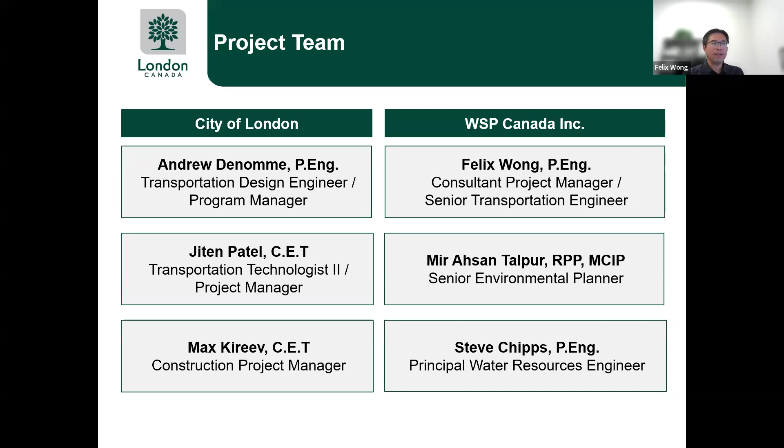Hi, my name is Felix Wong. I'm the project manager from WSP, and I'm also a senior transportation engineer with the company. With me today I have Mir Talpur, who is a senior environmental planner, as well as Steve Chipps, principal water resource engineer. With the introductions complete, I will pass it on to Mir to start off with the presentation.

Thanks, Felix. Good afternoon, everyone. I will be providing an overview of this project and the purpose of this meeting, and some background about the project and how we came to this point in this undertaking. Then I will hand the presentation back to my colleague Felix, who will go into the details of the planned improvements, and then I will take over again to go over the required environmental permits and approvals for the project, environmental protection measures, and the construction schedule.

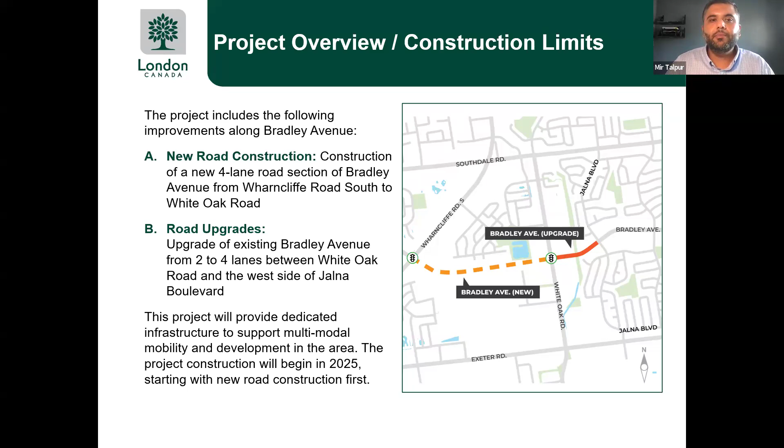As Andrew mentioned earlier, the planning of this project has been going on for quite some time. In 2005, the City of London completed an environmental assessment study which recommended the extension of Bradley Avenue from White Oak Road to Bostwick Road, with a 4-lane cross-section with dedicated pedestrian and cycling facilities.

In 2013, the city completed a transportation master plan update confirming the need for this extension to manage continued growth in the city. In 2017, construction of Bradley Avenue between Wonderland Road and Wharncliffe Road was completed.

In 2018, the city initiated detailed design and property acquisition for the Bradley Avenue extension from Wharncliffe Road to Jalna Boulevard. An addendum to the 2005 environmental assessment was completed in 2022, recommending widening of Bradley Avenue from White Oak Road to Jalna Boulevard with dedicated pedestrian and cycling facilities. As noted, construction is planned to begin in 2025.

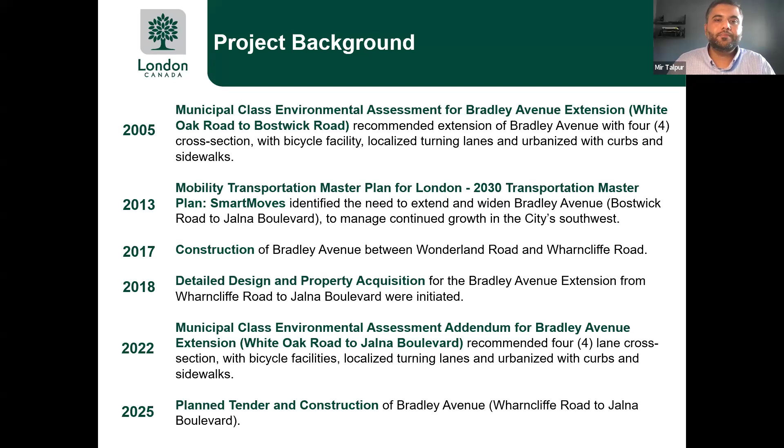I will now hand it over back to Felix, who will go into the details of the project components. As Mir mentioned, we're going to start with the Bradley Avenue extension portion between Wharncliffe and White Oak Road first, followed by the widening portion between White Oak and Jalna Boulevard.

For the extension portion, the existing land within the proposed corridor is mainly vacant land to facilitate future developments, as well as wooded areas. There is an existing stormwater management pond located just west of White Oak Road, top right corner of the map. There are existing portions of Bradley Avenue just west of Wharncliffe Road South and easterly of White Oak Road, with a missing connection between the two sections of road.

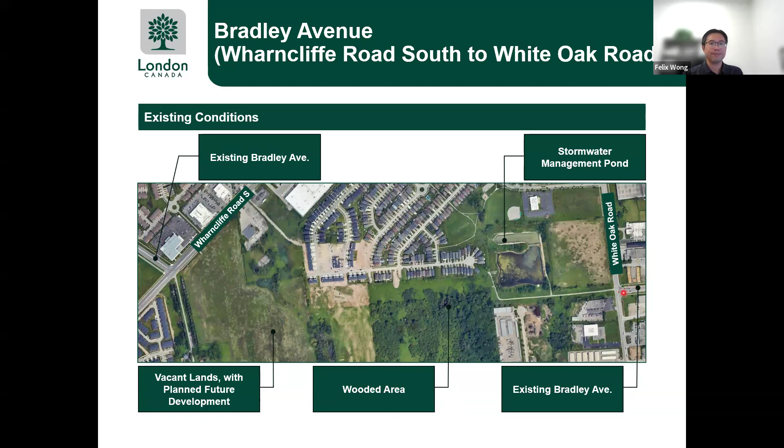As part of the planned works, the proposed extension connects the two pieces of Bradley Avenue running through the vacant lands and woodlots, requiring removal of some trees within the wooded area. The road is proposed as a 4-lane urban road with proposed storm sewers and water main. Vegetation removal to facilitate this extension will begin in the fall of this year.

A new traffic signal is proposed at Wharncliffe Road South, and existing signals at White Oak Road will be upgraded. The existing stormwater management pond is being upgraded to provide stormwater management for the proposed roadway. A new culvert is proposed at the White Oak Channel to maintain drainage, and the channel corridor will also be upgraded as part of another city project.

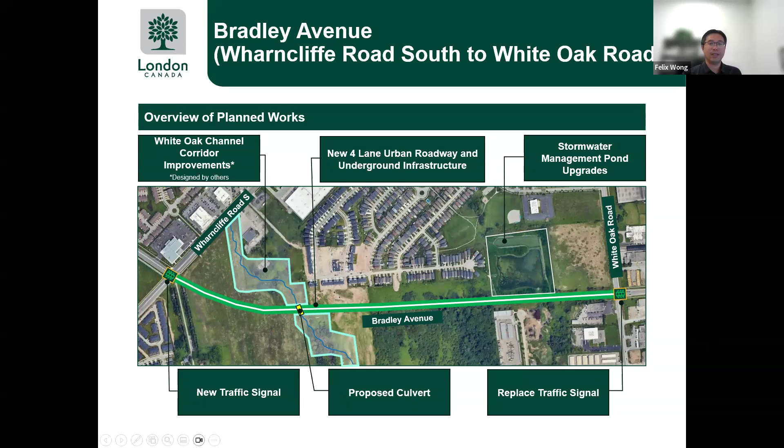Here is a clip of the proposed roadway extension. A full plan of the proposed work is available on the city's project website for download.

This proposed roadway is a 4-lane urban road with 2 lanes each direction. Turning lanes are proposed at the intersections. There will be proposed sidewalks and bike lanes located on both sides of the road, as well as a landscape boulevard provided between the curb and the sidewalk. The intersections are being improved to facilitate crossings by multiple modes of mobility.

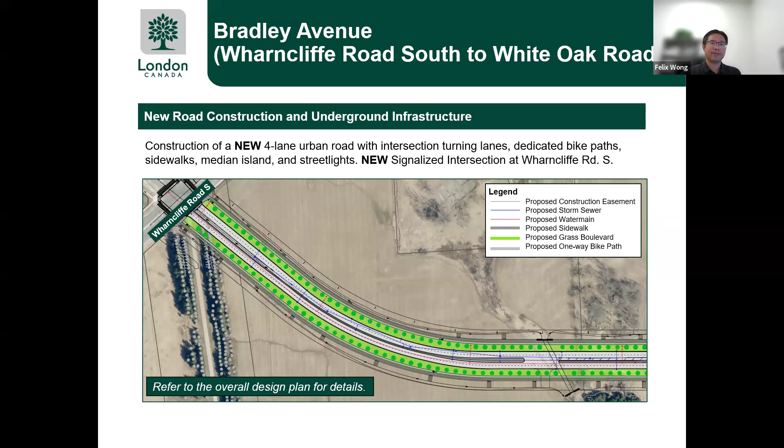And here is a typical cross-section of the proposed road work. The proposed road will have a 45-meter right-of-way, and as noted earlier, 2 lanes of traffic for each direction. There will be a raised center median, and full illumination provided throughout the corridor. Sidewalks and bike paths are on both sides of the road, separated from traffic, and there will be a landscape boulevard in between.

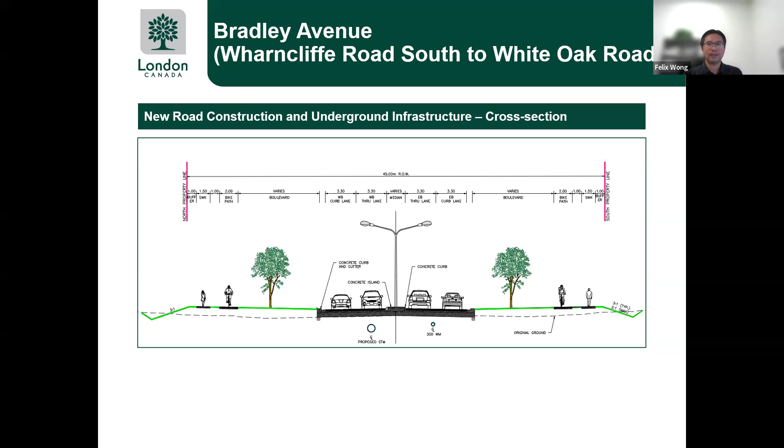In terms of the stormwater management pond, the existing pond will be upgraded to provide additional storage. This facility is on the west side of White Oak Road and will be on the north side of the proposed roadway.

A 4.2 meter span culvert is provided at the White Oak Channel. This culvert will allow fish passage within the improved naturalized watercourse.

As part of the city's future project, this future channel corridor improvement will include construction of a naturalized channel corridor crossing Bradley Avenue just east of Wharncliffe. The complete corridor design will include a 60-meter wide corridor of open space, incorporating a natural drainage channel, wetland compensation, wildlife habitats, recreational trails, as well as stormwater management facilities.

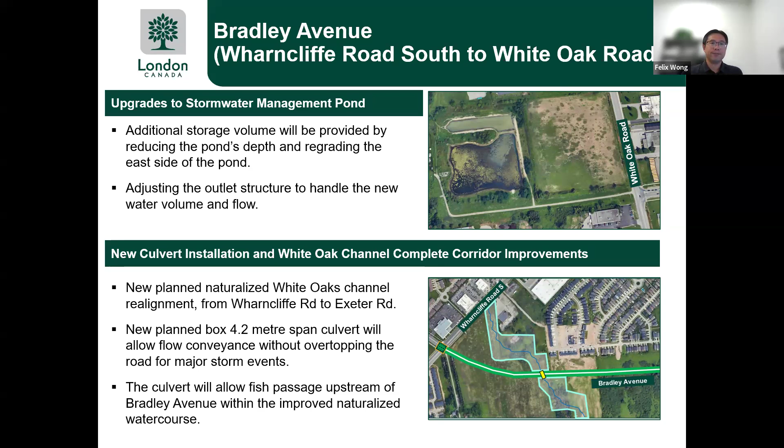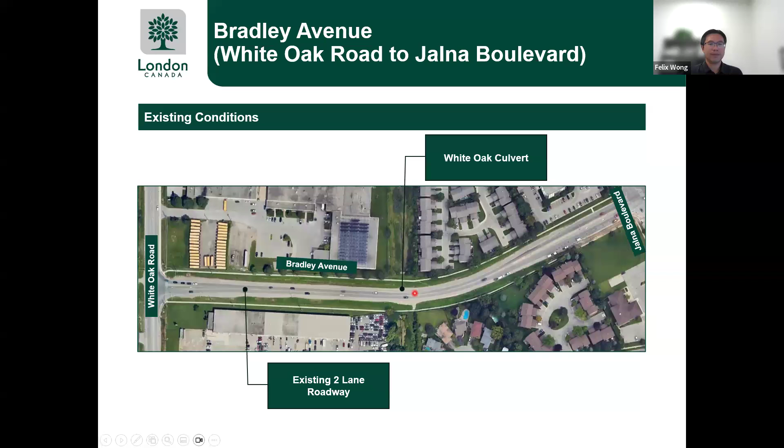With the proposed work, the proposed road will be widened to 4 lanes, 2 lanes each direction. It will be an urban cross section with curbs, sidewalks, and bike paths, as well as landscape boulevards where feasible. The existing culvert will be replaced to improve existing drainage conditions, as well as the signals at White Oak will be upgraded.

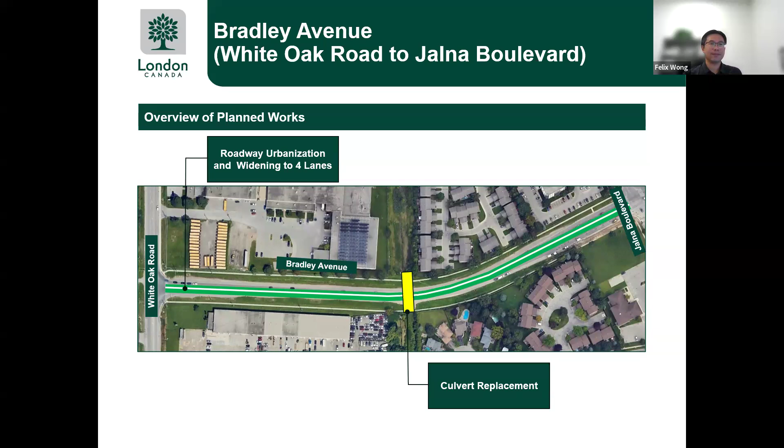And here is a clip of the proposed roadway improvements. Again, the full plan is available for download at the city's project website. As noted earlier, this proposed widening will consist of 4 lanes in total, 2 lanes each direction. There will be curbs, sidewalks, and bike paths.

As shown on the drawing, the intersection at White Oak Road will be improved with modifications of the traffic signals. This will facilitate movement by multiple modes of mobility. Pedestrian and cyclist safety are being improved at the intersection with provisions of pedestrian crossings at all legs, while we try to shorten the pedestrian crossings where possible. As well, bicycle crossrides and bike boxes are being provided. As noted, the existing culvert will also be replaced.

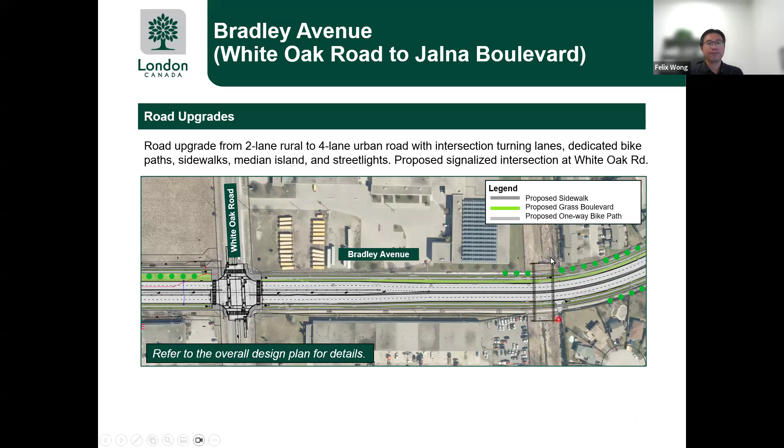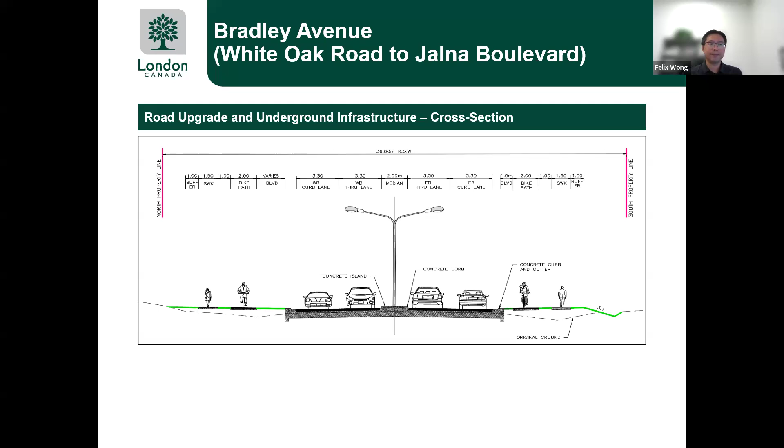The proposed culvert will be replaced and upsized to improve capacity and flow conveyance of the crossing. This is being proposed as part of the city's resiliency to climate change. As part of the improvement, existing weir structures along the channel will also be removed. The new structure will allow for flow conveyance without overtopping of the road for major storm events, which would reduce the risk of flooding in the area. As well, the proposed work will also improve fish habitats and fish passages.

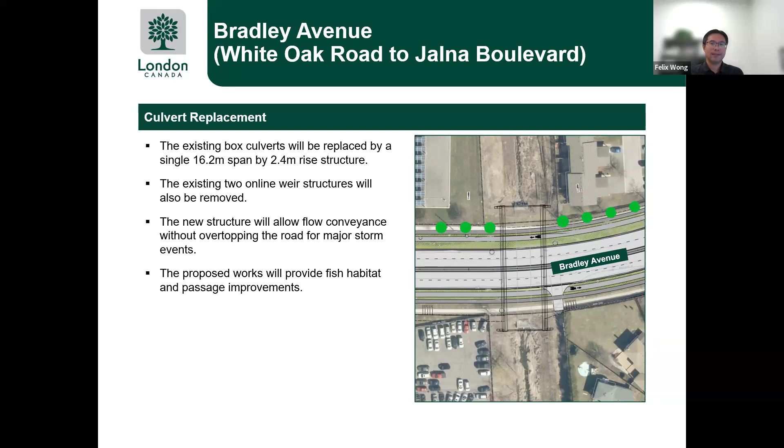In terms of construction staging within this part of the existing road of Bradley Avenue, we are anticipating to maintain a single lane each direction throughout the construction duration. In stage 1, we will shift traffic slightly to the north while we widen the road to the south. Then in stage 2, we will shift the traffic to the south to the widened portion and construct the north half of the road. During stage 2 as well, we will be constructing the north half of the culvert, as well as lowering of the existing water main to facilitate this culvert replacement.

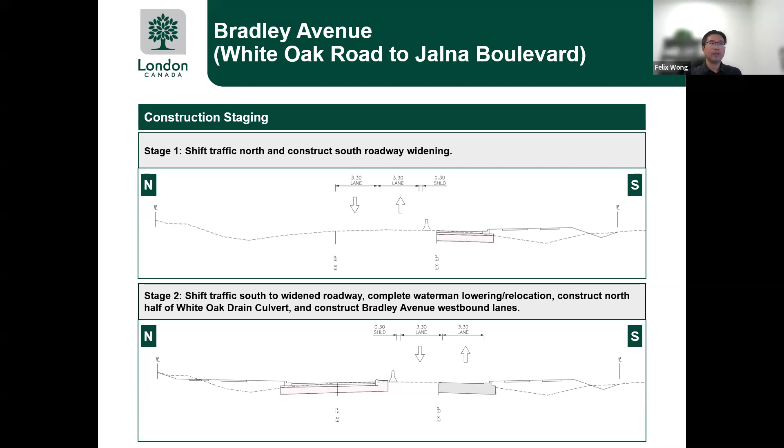Then in stage 3, we will shift traffic to the north to the newly constructed roadway. This will allow us to complete the roadwork on the south half, as well as completing the south half of the culvert. And then finally, in stage 4, we will complete the top course paving, the median islands, as well as illumination and landscaping.

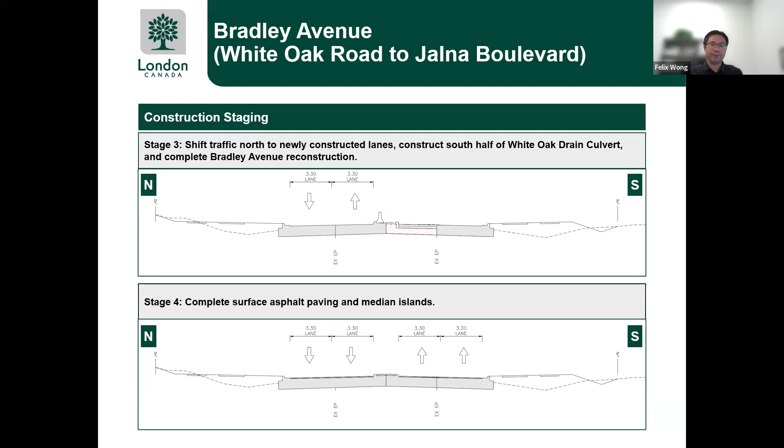I will pass the presentation back to Mir, who can speak to the environmental permits and approvals.

Thanks, Felix. I will now go over the required permits and approvals for the project, the recommended environmental protection measures and compensation measures, and the project construction schedule, which will conclude my part of the presentation. I will then hand it over to Megan to facilitate questions and answers.

Starting with the permits and approvals, throughout the design phase of the project, we have been consulting with various regulatory agencies to seek regulatory input as well as the need for permits and approvals.

This includes a submission to Fisheries and Oceans Canada to obtain advice under the Fisheries Act, and a similar submission to the Ministry of the Environment, Conservation and Parks to obtain advice under the Endangered Species Act for potential impacts to species at risk. An environmental compliance approval permit is also needed from the Upper Thames River Conservation Authority for works in regulated areas under the Conservation Authorities Act, as well as an arborist report and satisfying the city's forestry staff requirements under the city's tree protection bylaw and boulevard tree protection bylaw.

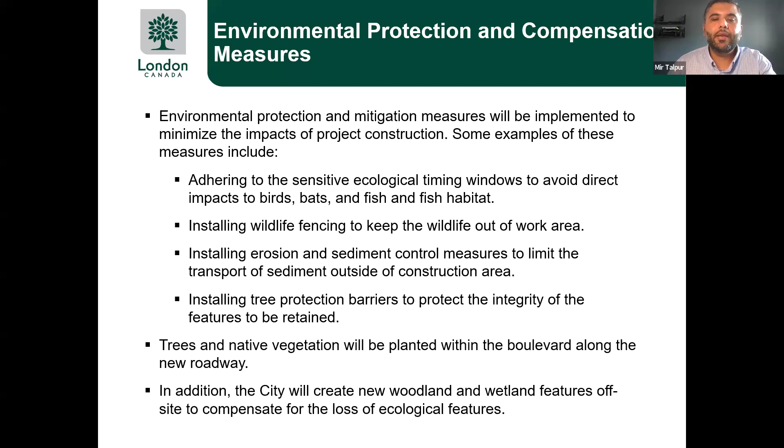This concludes my part of the presentation. I will hand it over to Megan, who will facilitate questions and answers.

Awesome, thank you. All right, we do already have a few questions, so I will dive right in. The first one is around construction timing. Are there any factors that might delay the start of the project occurring in 2025?

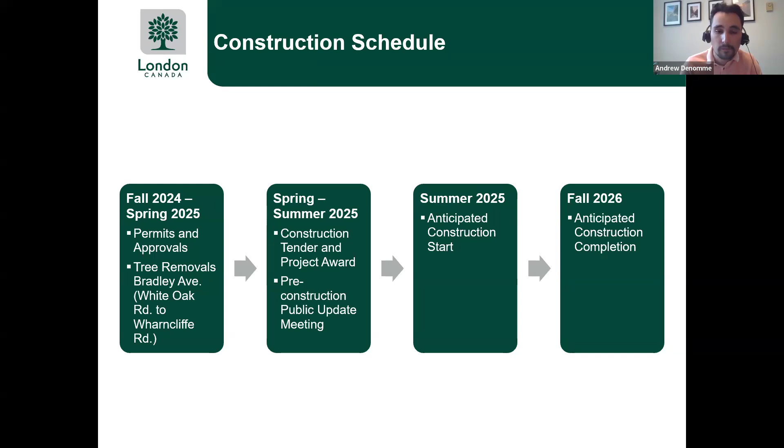And yeah, I guess you may see some pre-construction work beginning in the next couple months, which would include tree removals. Okay, yeah, thanks for bringing that slide back up. Just good to have a clear path forward for everyone.